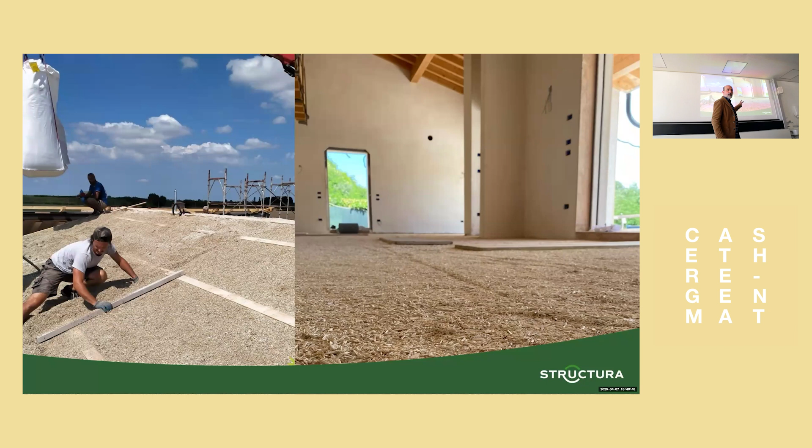These are examples of applications of the bulk lime-hemp mixture. On the left side, as you see, it's a roof. On the right side, it's a floor. Here we have the combination of the bulk lime-hemp together with lime-hemp bricks.

And this is also interesting, let's put it this way, when you have older walls that don't have a regular surface anymore and you want to work with lime-hemp. Then you can use the bulk lime-hemp to fill the gaps or the spaces you leave behind the lime-hemp brick wall.

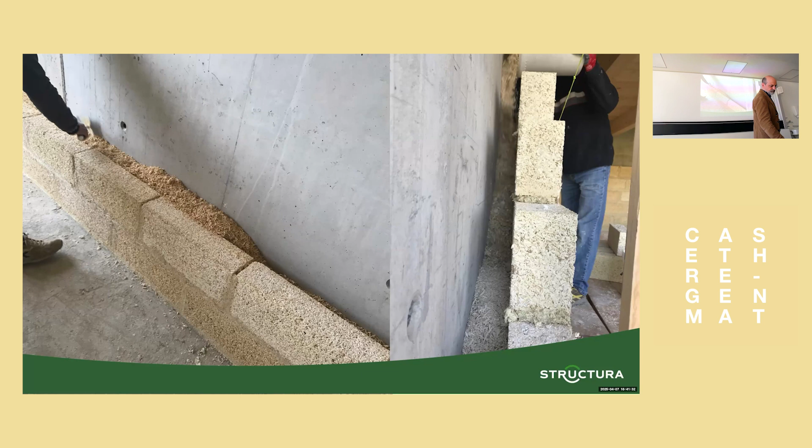This is an example of a construction site. This was last year, by the way, in the Alps, to be more precise, in southern Engadine. The village in which this was built has the reputation of being the coldest village in the Alps, up to -30 degrees Celsius, just to be clear, peak temperature. It's the 5th building we built in that village. So the first one was around 11 years ago. And then people were happy, were talking about it, and they enjoyed it.

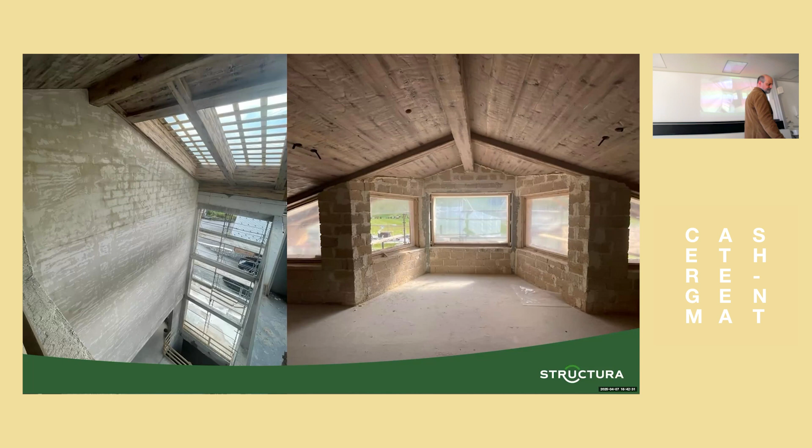And so altogether, at some point, the owner of the hotel came and said, I want to use lime-hemp to build my hotel. And this hotel opened November last year. This is the end product of it, one room. To give you an example, of course, it is decorated here. The wall in the middle also has a lime-hemp plaster, by the way.

This is a project in Basel, in the city of Basel in Switzerland. It is a historical site, so it's a protected site. And the owner of the building, this is one of the buildings of the Christoph Merian Foundation in Basel, and they decided to use these materials. The architect pushed a lot, but this is the second site where they use these materials.

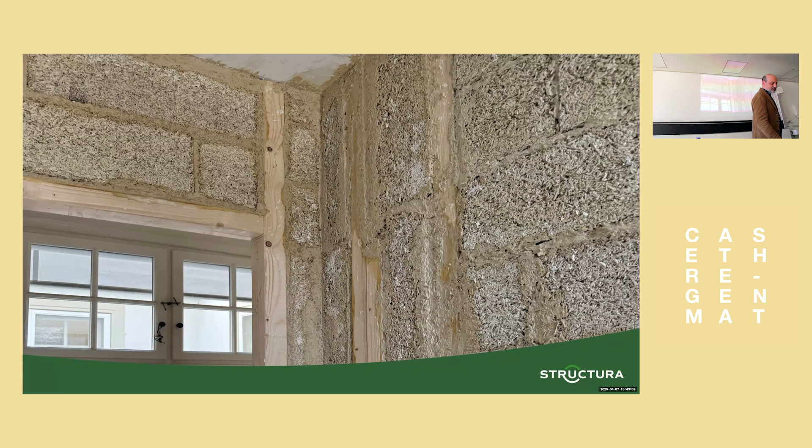What is probably even more interesting is the fact that this is the same building, but it's a different part of the building. This is a fireproof wall, just to be clear. And I'll get a little more into the details because I think it is important in this conversation. This is a so-called vertical emergency exit way, the way we define it in Switzerland. Okay, so that means that you have the highest fire resistance requirements according to Swiss norms.

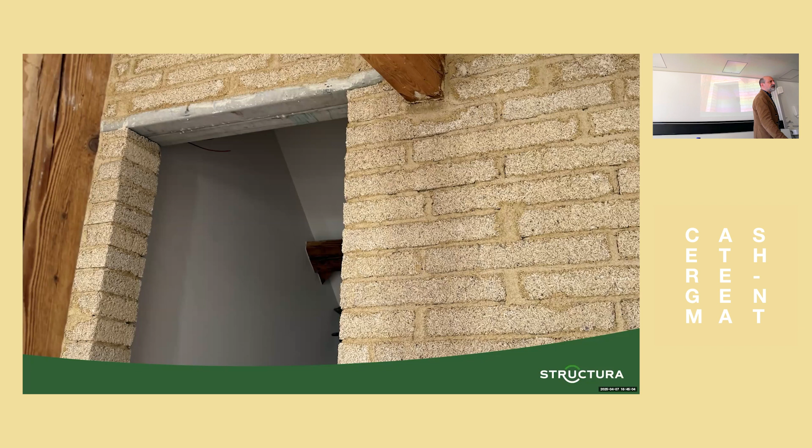Okay, EI 60 RF1, and it's fulfilled. Just to be clear about what I meant earlier, talking of fireproof. And the canton of Basel, based on my experience in Switzerland, is one of the strictest when we're talking of fireproof regulations.

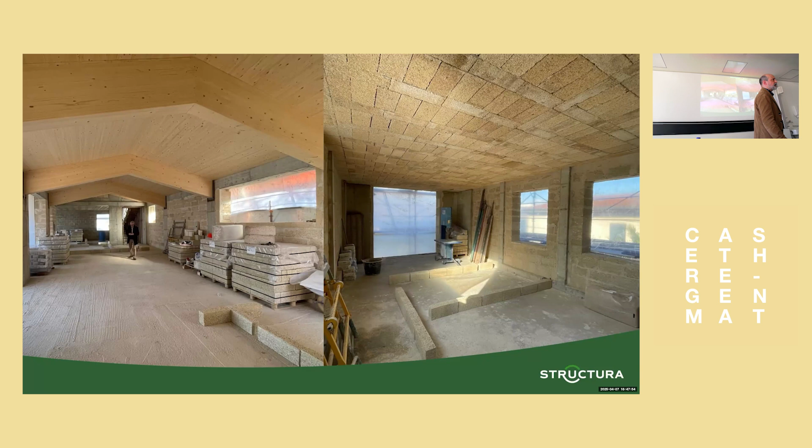Of course, then it gets plastered, covered, whatever, and you won't see it anymore when it is finished, unless you know you have lime-hemp bricks in there. Next slide, flat rooftop covered with lime-hemp bricks, reinforced on purpose. If you look at the right picture, you understand very quickly why.

This is a combination, and this is going back to what I said earlier, to stay realistic about the minimal ecological footprint. This is one example of why I said that, because this is a combination with concrete, of course. So some people look at me with such eyes when I show this, but here, this is the only way in this very specific setup to get rid of, or replace, let me be more polite, the polymer-based materials.

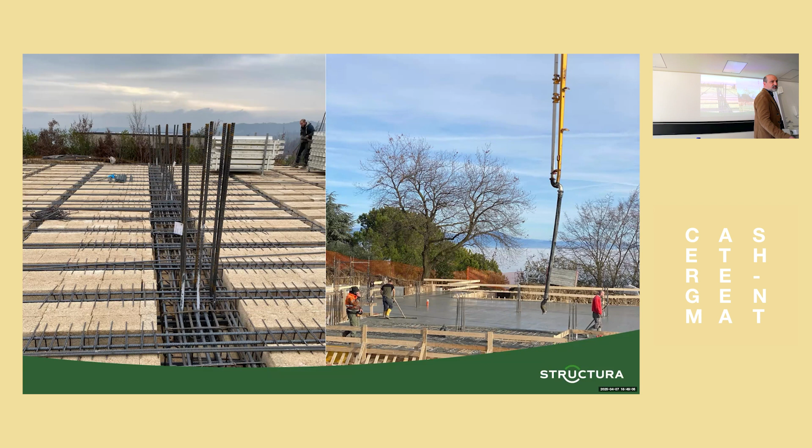Okay, so going back to minimal ecological footprint and the fact of staying realistic. That's what I meant. One example. This is a project in a fairly exclusive area of Tokyo, in Japan. So the construction work started. Why the Japanese like Lime-Hemp, because I mentioned it briefly earlier.

The fact that there is, let's put it this way, hydraulic lime in the mixture, as I mentioned earlier, makes the material rigid. But at the same time, we have a component of the aerial lime, which is hydrated lime, that keeps, and here we talk about the mechanical properties of the material, the elasticity of the material. That means that this material is very adapted in earthquake regions.

And this is one of the reasons why the Japanese, and there are already several projects ongoing in Japan, this is by far not the first one, love these materials. The other reason why they love these materials, some of you might know a little bit of the Japanese philosophy and approach to life. They very much appreciate high quality. So they love the quality of these materials.

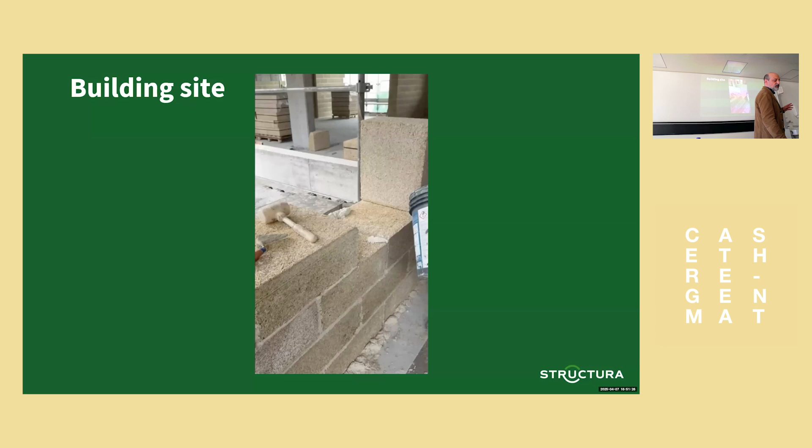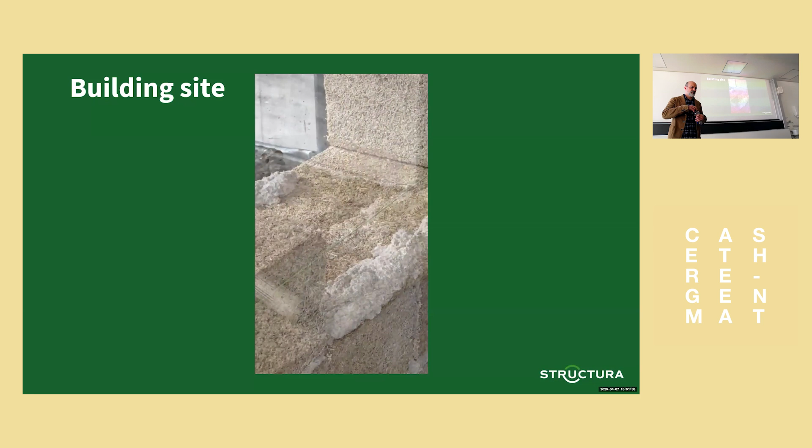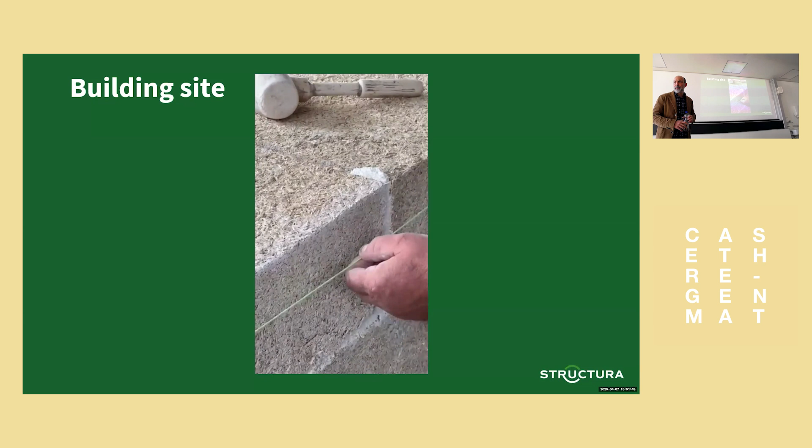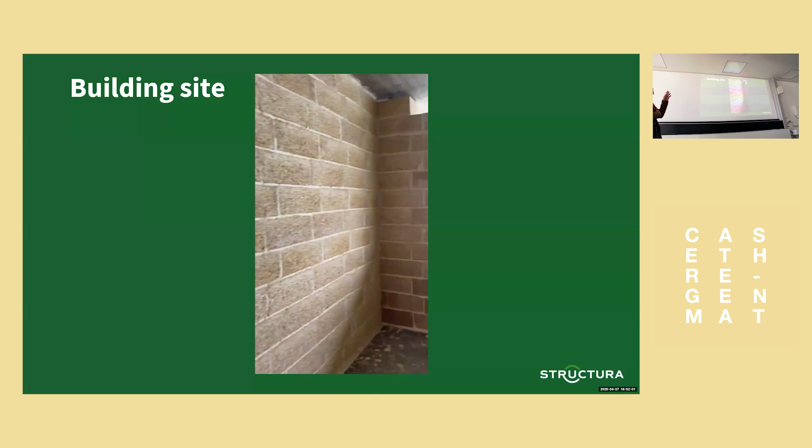The video was done with a mobile phone. Don't be surprised, it's not a highly professional video, but I think you will get a sense of what's going on. And particularly the applications, because I think it's a good mixture of applications you can see here in this building.

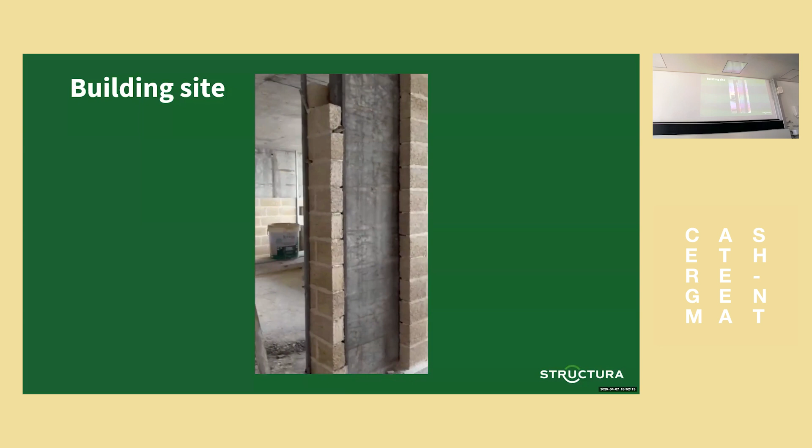Do they have to be plastered or not necessarily? Indoors, not necessarily. With the bricks, you can leave them like that if you want. But this is a property development project. It's quite a big project. So the owners are going to plaster it.

And for fire resistance, do you need to plaster it, or is it also fire resistant without plaster? Well, it is in this case. It is EI 180 certified, by the way. So if you need more, then yeah, you can cover it with plaster. By the way, that was the case in Basel, because that wouldn't have been enough. They wanted both EI 60 plus RF1.

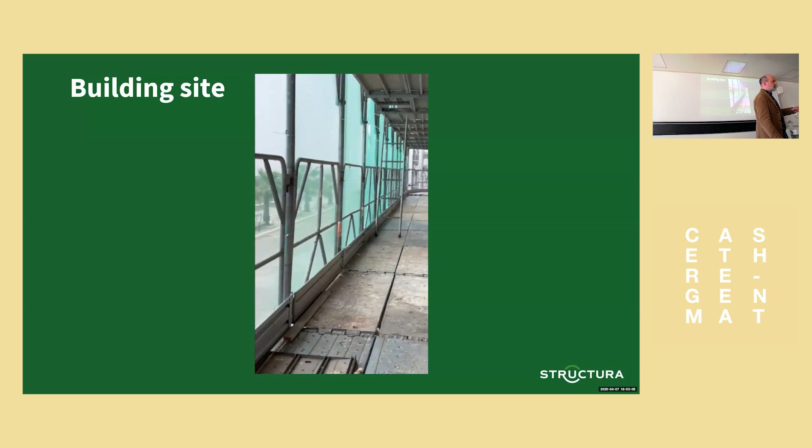Acceleration, what do I mean by acceleration? I think that we really need to keep a higher political pressure. We need to make sure that the legal framework is adapted, because today the norms that are in place in Western Europe clearly are not really adapted to natural materials, ecological or biosourced materials in general. By the way, it has nothing to do with Lime-Hemp in particular. Of course, Lime-Hemp is part of that. And incentives.

Clearly, the incentives people get today for using polymer-based materials are much easier to get than the incentives you get to use this type of materials. And I hope strongly that this will change. And of course, a stronger push in education. Here we're at the right place, I guess, but it needs to be much broader than this. It really needs to cover all of the functions in the construction area, I believe.